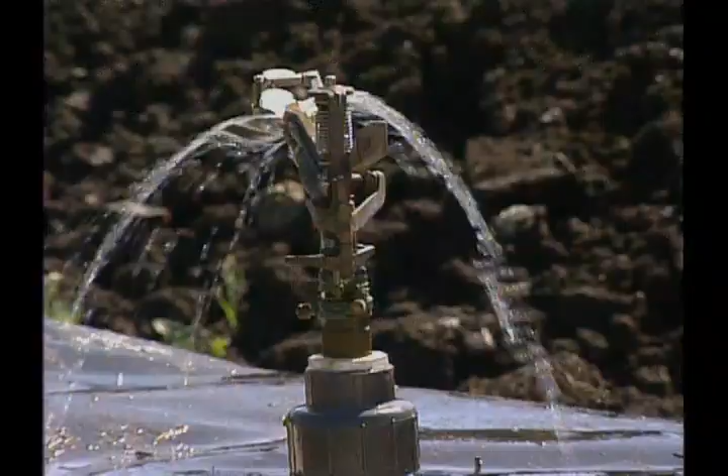Water. It's essential to our very existence, not only to meet our needs at home and on the job, but as a source of recreation and enjoyment. While many of us may think water is in plentiful supply, that is not always the case. Nowhere is that more apparent than in Southern California, where a growing population and dwindling supplies are putting the whole region on track with disaster.

For decades, this region has relied on a complex system of reservoirs and aqueducts to supply most of the water used by its businesses, industries, and people - more than 15 million today, and still growing. These supplies, imported from hundreds of miles away, put the bloom into arid Southern California, and today support an economy that ranks among the top industrialized nations of the world.

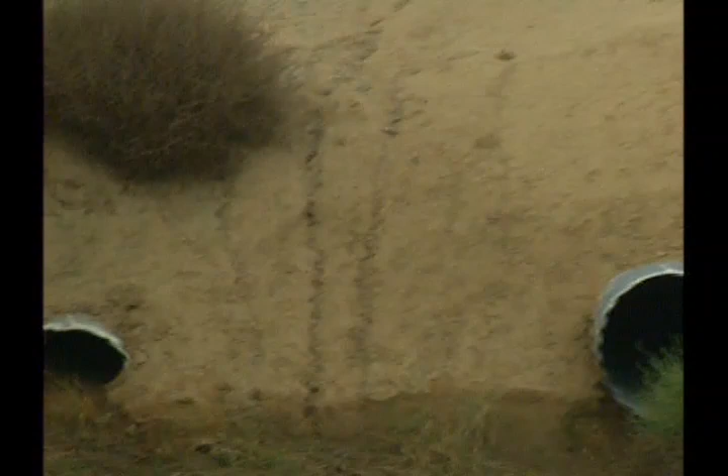A substantial portion of the area's traditional supplies have been lost through litigation, among other factors, and an enormous strain has been added by the devastating droughts of recent years. In the face of catastrophic water shortages, something had to be done to preserve this way of life for future generations, and indeed provide support for the economy on which the area relies. Billions of dollars in production and thousands of jobs were at stake. Today's environmental protection requirements for endangered species, however, make it extremely difficult to build additional water facilities and new lakes.

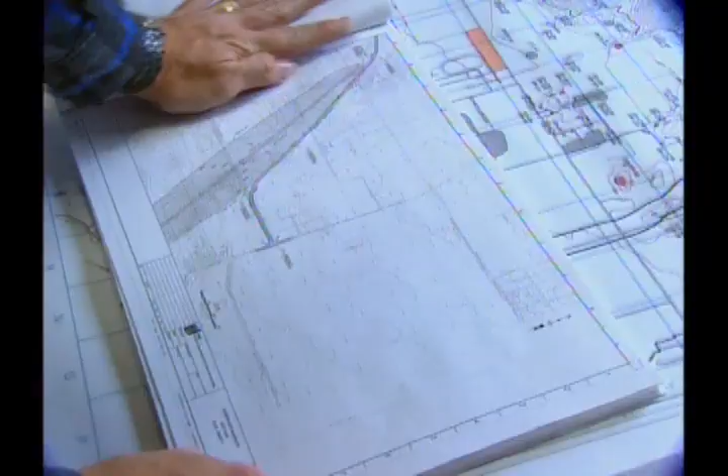But a bold and innovative partnership has developed in which environmentalists, regulatory agencies, and the Metropolitan Water District of Southern California have joined in a cooperative effort to not only help Southern California meet its needs, but at the same time protect and preserve the region's magnificent natural grasslands and woodlands, and the many species of animals that inhabit them.

Here in southwestern Riverside County, some 90 miles east of Los Angeles, nestled between these rolling hills, a huge new water storage reservoir will be constructed. When completed in 1999, dams will be in place at each end to create a reservoir in the Domenigoni Valley, 4.5 miles long, 2 miles wide, and 250 feet deep at its deepest point. It will form the largest freshwater lake in Southern California, holding more than 260 billion gallons of water.

As part of the project, Metropolitan Water District will be a major contributor toward the purchase of 3,800 acres of oak-studded hills and prairies on the Santa Rosa Plateau. In addition, the company purchased the Roy E. Shipley Reserve with its 2,500 acres of highland habitat, which will link the new reservoir's 12,000 acres with the open space at nearby Lake Skinner. A combined total of 22,000 acres will be set aside for environmental and recreational uses.

The vastness of this area will enable an entire ecosystem to be protected, rather than just individual species. Innovative programs like the Domenigoni Reservoir will help Southern California meet its water needs into the next century, while at the same time preserving valuable environmental resources, an important and irreplaceable vestige of the California of old.

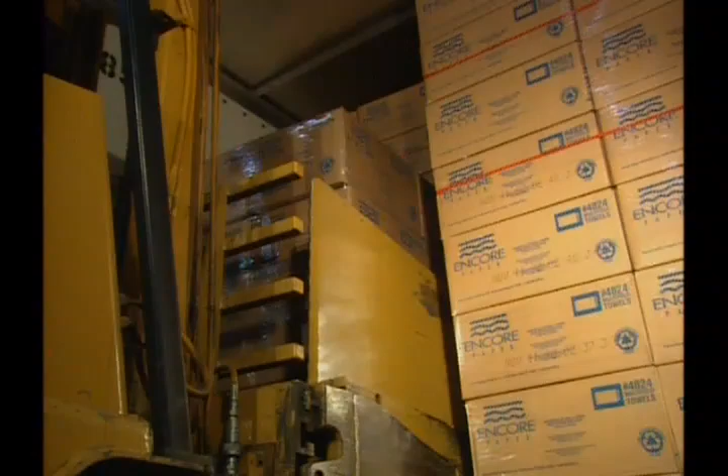Buying recycled goods is just as important as recycling them. This produces the loop that creates a demand for recycled rather than virgin-based materials for new products. Now, companies, along with consumers, are not only donating recyclable goods to help the environment, but they are also buying them.

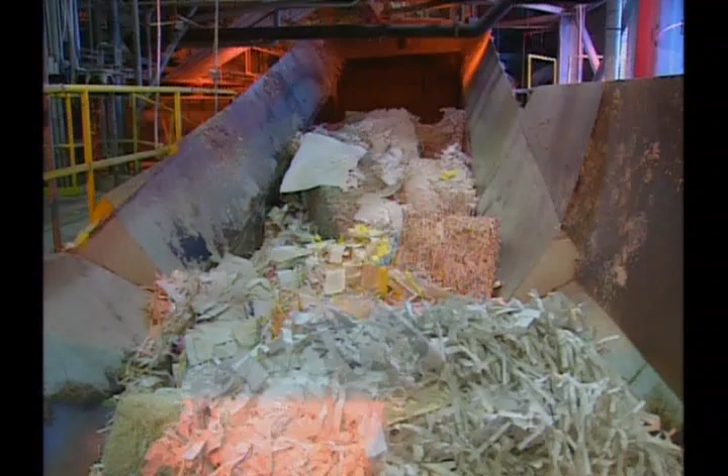Tons of discarded paper are collected from businesses throughout the Northeast each week. All of this waste paper would normally be landfilled or incinerated. But the Encore Paper Company of South Glens Falls, New York, is taking a major portion of this reclaimable resource, recycling it into paper products, and selling it back to major corporations and local businesses. This system creates its own loop and ensures a market for what was once thought of as garbage.

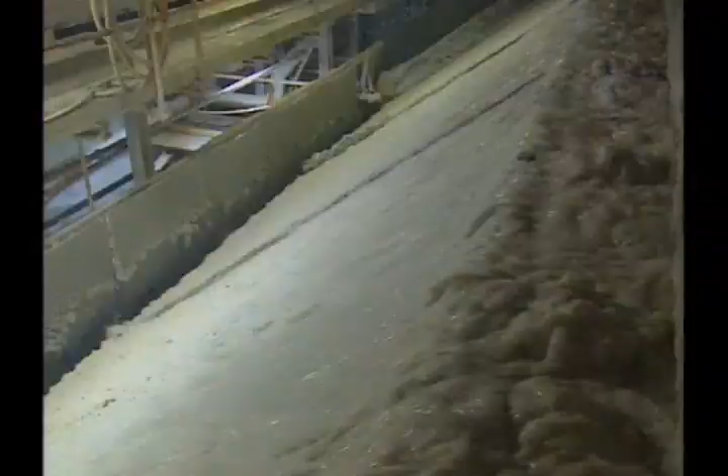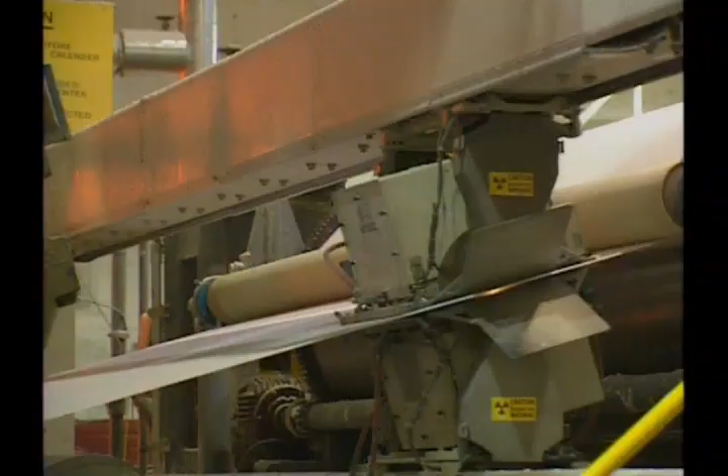The paper is brought to the plant where it undergoes its first stage, de-inking. The usable paper fiber is separated from the ink with a combination of caustic soda, hot water, and an agitator. It's then screened to get rid of any paper clips and staples. The pulp is diluted and spread over a moving screen, making thin sheets of paper, before being dried and wound onto large 2-ton rolls of paper.

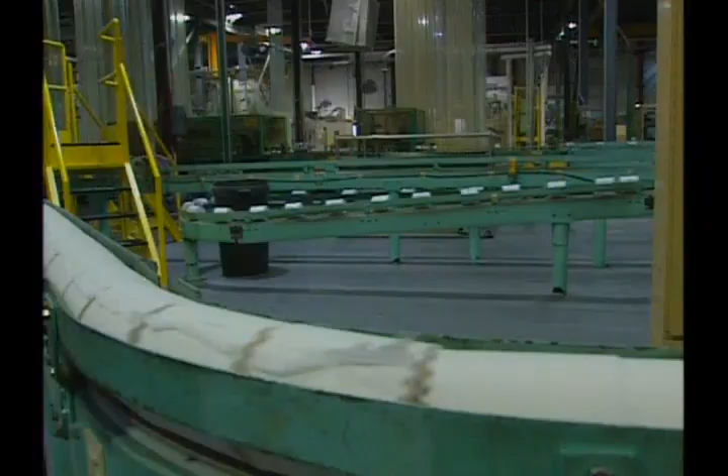These are cut, wound, or folded into smaller rolls to make all sorts of paper goods, from napkins to tissues to paper towels. Products that will be used by thousands of people every day in restaurants, department stores, and employee lounges. All of Encore's products are made from 100% recycled fiber, which saves 880,000 trees every year, a vast amount of landfill space, and keeps harmful incinerator emissions from polluting our air.

A typical faucet uses 3 to 5 gallons of water per minute. If the water is left running when you brush your teeth or shave, you're wasting a lot of water. Shut it off when you don't need it.

Next, we'll see how another environmental problem is being addressed.

What good can come from water going bad? Well, strangely enough, there can be benefits. When it was discovered that Boone Lake was being polluted by wastewater being discharged into the lake, Bristol, Tennessee, and Bristol, Virginia, the two cities which share the wastewater collection and treatment system, decided that it was time to take positive action to upgrade their facility.

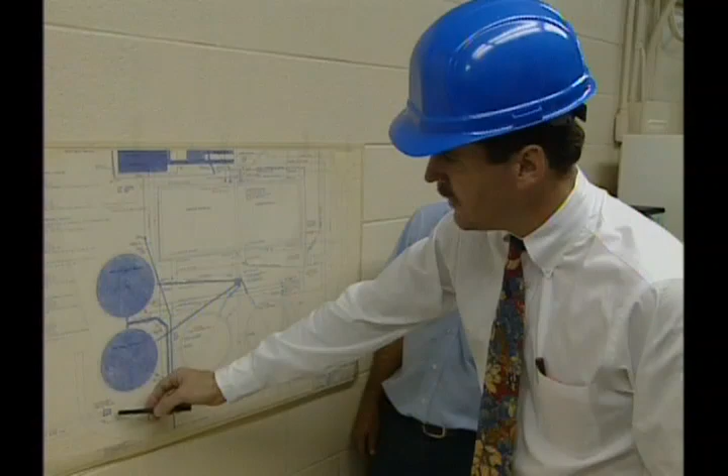With the goal of staying ahead of future demands, a $24 million program was put into effect by the Twin Cities to provide a unique solution to their biosolids or sludge disposal problems. The day-to-day operations, maintenance, and management of the system are carried out by Houston-based Professional Services Group Incorporated, which has operated the city's wastewater treatment plant since 1987.

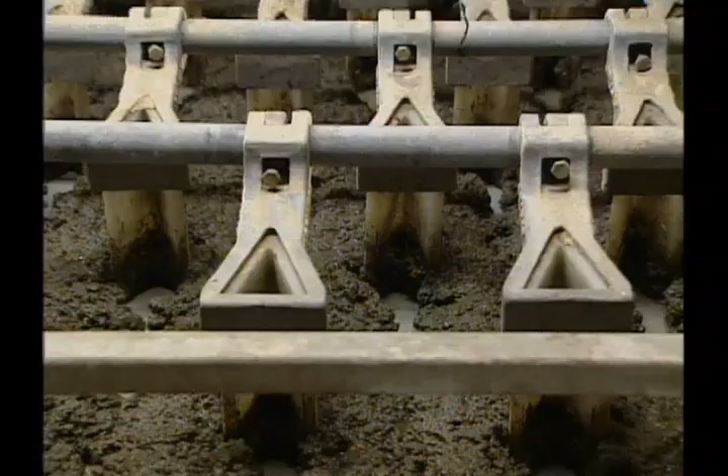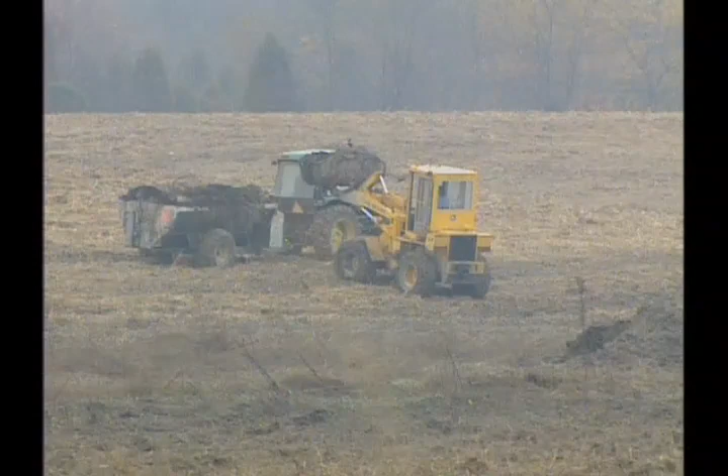One of the major problems in a typical facility is the disposal of biosolids, the substance remaining after the wastewater has been cleaned up. Because incineration proved too costly, inefficient, and unreliable, PSG began applying the processed biosolids to farmland in 1987, working closely with Bristol officials. A $7 million composting system for biosolids has replaced the land application method and is now Bristol's primary disposal method.

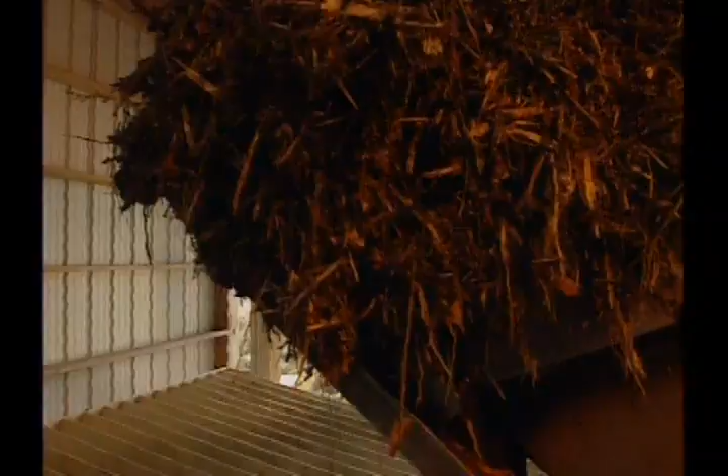Composting is accomplished in a system where a coarse sawdust is added to the biosolids. The sawdust acts as a biological carbon food source for the naturally occurring microbes, bacteria, and fungi, breaking down and decomposing the organic waste, thus creating soil improvement.

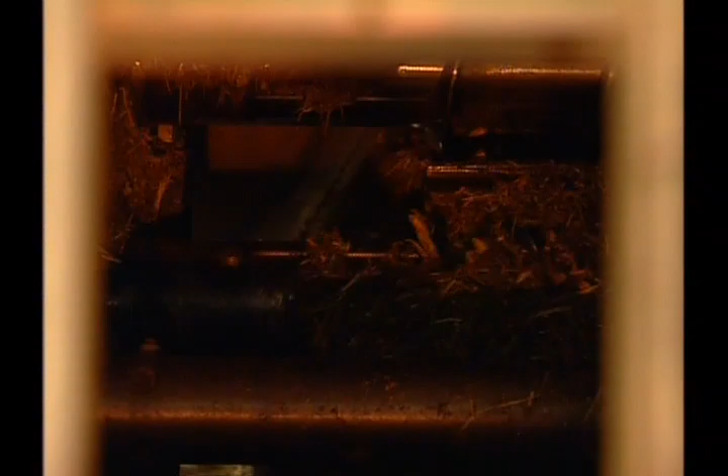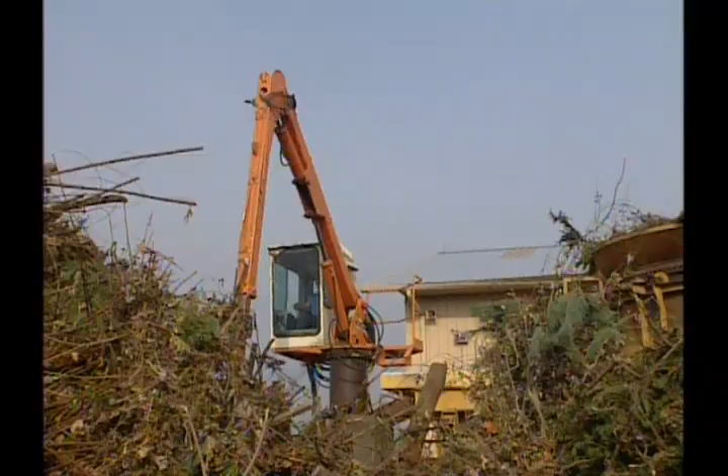The cities originally planned to purchase wood chips to grind into sawdust for use in the process, but found it was more advantageous to make it on-site from brush waste generated by both of the cities. Since this waste would have eventually wound up in the local landfill, the composting process is providing an additional environmental benefit to the community. An on-site grinder reduces the wood to chips approximately 2 inches long, which are then converted into sawdust and mixed with biosolids.

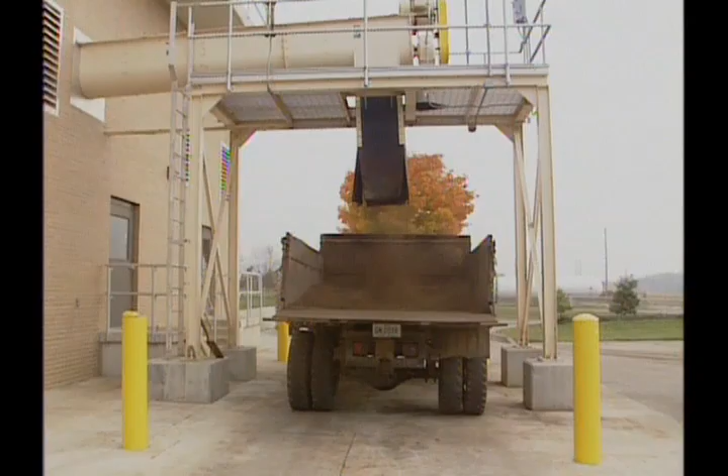The mixture remains in the system's bioreactors for 30 days, moving downwards as new materials are added at the top. Compost is removed regularly from the bottom of the cure reactor and placed in rows on a concrete pad for final curing. The result of the process is a granular, nutrient-rich soil additive that looks like peat moss.

It has been cleared by the state of Tennessee for unrestricted use. It's suitable for landscaping, nursery, and horticultural applications, and will be used at the city's public golf courses and parks. While it is currently being used for the community or given away, sales of the compost will eventually offset a portion of the compost production costs.

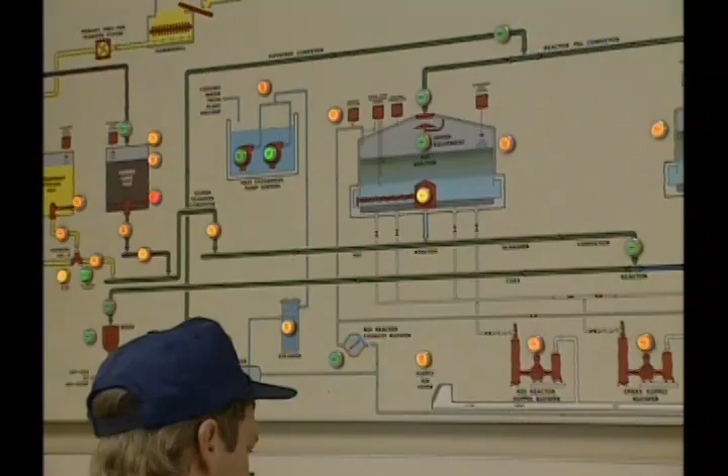Community leaders are confident that Bristol's sludge composting system will satisfy any future biosolid disposal regulations for at least 20 to 30 years, while providing some very positive benefits to the environment.

Washing a pair of jeans by itself in an automatic washer is not very environmentally sound. To get the most out of your washer and dryer, wait until you have a full load. Otherwise, you waste water, energy, and soap.

Now let's turn our attention to the solution of another environmental problem.

When we think about our environment, we must consider everything that surrounds us. We must consider the consequences of littering our streets and roads, because ultimately this is usually where it ends up, in our water systems. And what about the effects of smog and air pollution produced by industry and traffic? The effects may permanently damage the Earth's atmosphere as well as our water supplies.

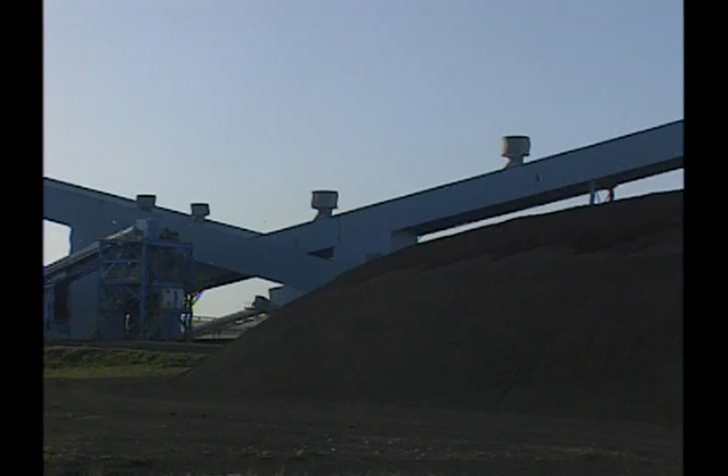A major contributor to this kind of pollution is waste of another sort, the wasting of energy. The seemingly insatiable demand for electricity has put an enormous burden on our ecosystem. Most electrical power plants are fueled by coal. Although coal is plentiful and an efficient source of energy, a major component of acid rain comes from the sulfur dioxide emissions produced by burning coal. Naturally, the more electricity we use, the more coal we burn.

But polluting power plants might soon be a thing of the past. Here in Richmond, Virginia, is an electrical power plant that's smaller than most and generates over 110,000 kilowatts of electricity, enough to satisfy the needs of 84,000 homes. But it also provides all of the steam for a neighboring chemical company's manufacturing needs.

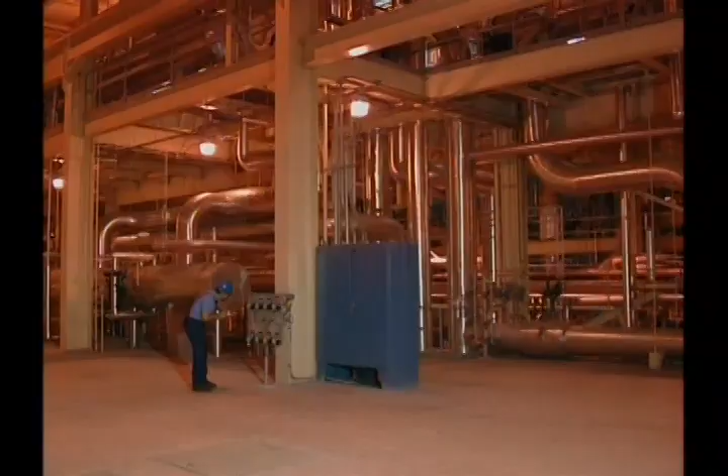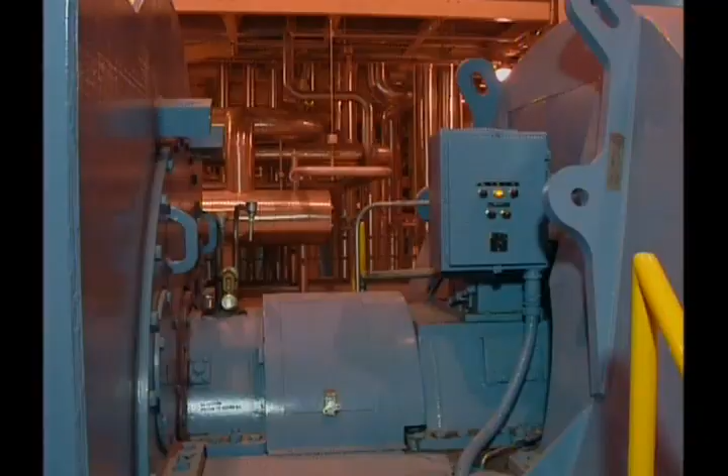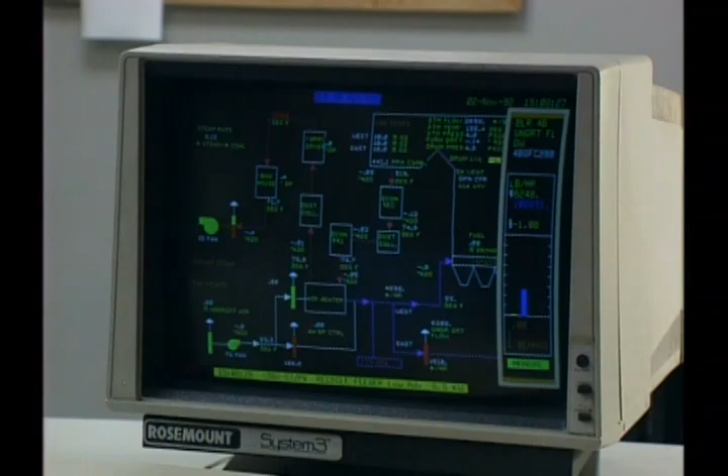It is one of 10 such utility-grade facilities developed by Cogentrix of Charlotte, North Carolina. These facilities were built at nearly two-thirds the cost of comparable facilities, making them among the most economical producers of electricity in the country. Although they're fueled by coal, these plants are also of special interest to environmentalists. They're smaller, making them less stressful to the immediate environment. They utilize innovative design, the latest environmental control technology, and cost-saving construction concepts. This is good for the economy as well as the environment, because it has greatly reduced the cost of producing electricity.

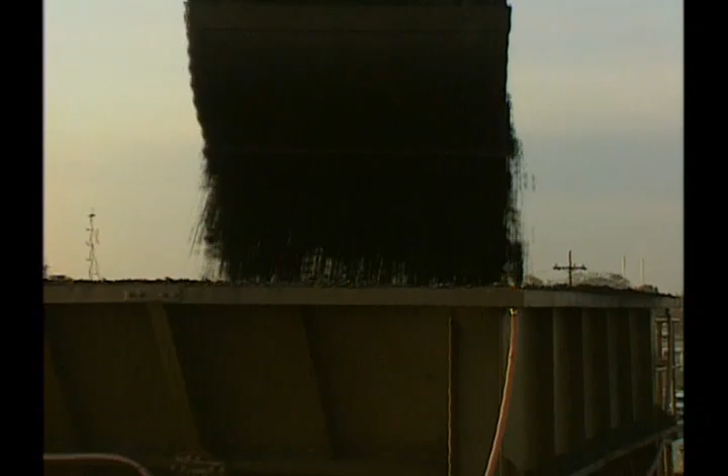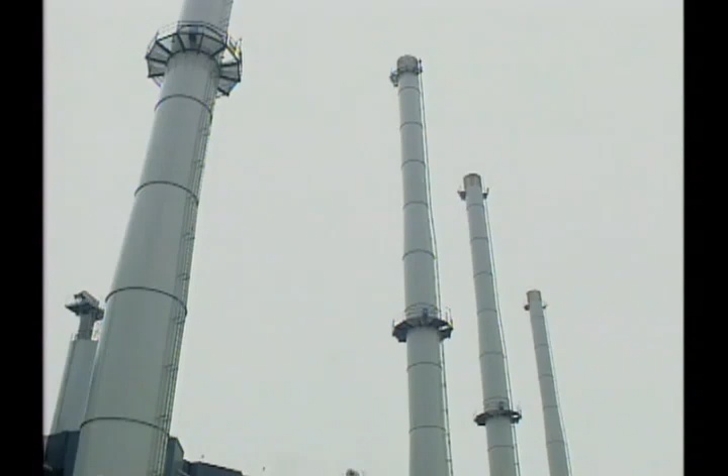This plant controls sulfur dioxide emissions to microscopic levels required by the 1990 Clean Air Act amendments for the year 2000, simply by burning low-sulfur washed coal. Some of the company's other facilities employ dry scrubbers to reduce sulfur dioxide emissions by more than 90%. Here, particulates, which are visible in smoke, are removed with a filtration system that is more than 99.8% efficient.

All of the residue from the filtration system is loaded into trucks for recycling by their subsidiary Reuse Technology. The leftover ash is used for fertilizer, potting soil, in the manufacturing of concrete block, and as structural fill. Water from brackish aquifers is treated and used in recirculating cooling towers. Environmentally safe chemicals are used to extend the use of each gallon of water in the system, minimizing demand.

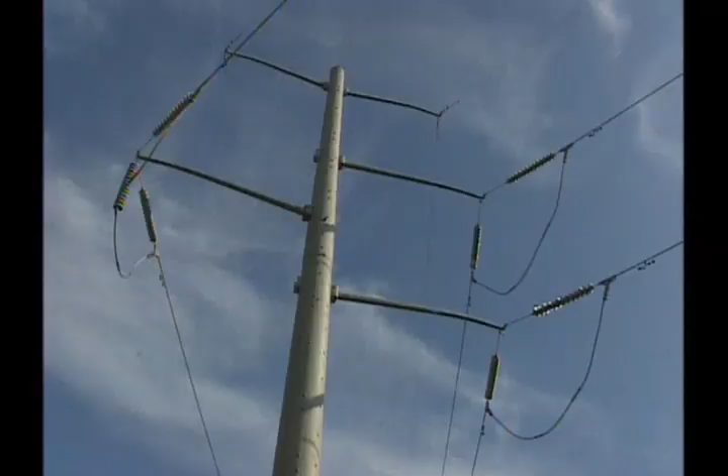Electrical power plants like the Cogeneration plant set a new standard in environmental responsibility in the energy business. Their innovative approach actually eliminates some pollutants from forming and manages those that do. And the recycling of ash residue all adds up to a successful effort in keeping the air and water clean while still providing the benefits and convenience of electrical power. Because each plant provides low-cost, clean steam to an adjoining business and electricity to the utility, they've formed partnerships with the communities they serve. Partnerships where everyone wins.

A leaky faucet that fills a coffee cup in 10 minutes can waste 3,000 gallons of water a year.

The really sad part is that a small rubber washer costing only a few cents can usually correct the problem. In this next segment, we'll see how one company is dealing with another environmental matter.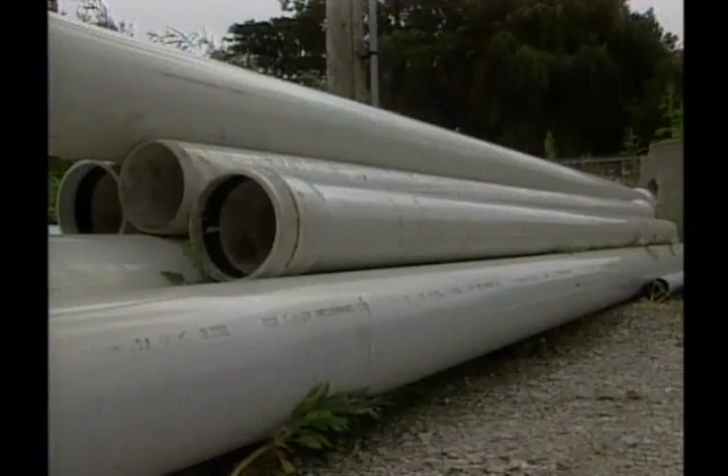If we want something to last for a long time, we take care of it. However, some things don't need to last a long time, like single-use packaging. This container, for example, is made from the same material as PVC water or drain pipe. These pipes are designed to last in the ground for upwards of 30 to 50 years. The PVC bottle may also last that long before decomposing, depending on the conditions to which it is exposed.

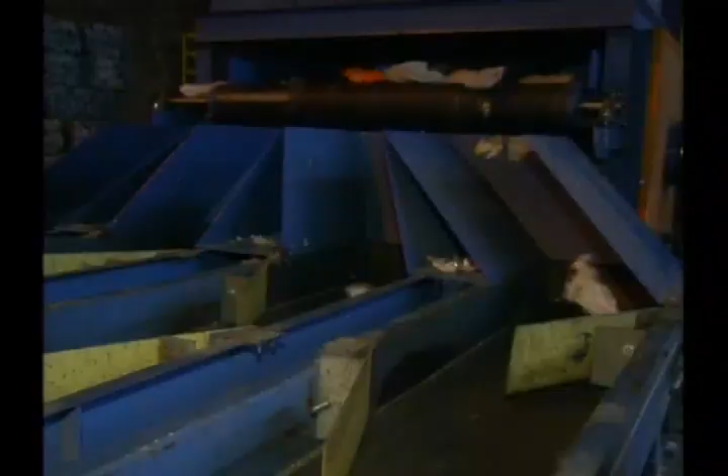If we dispose of these containers in a different way, modern technology can make good use of the discarded PVC. It no longer has to go to a landfill. Now this waste can be sent to a plant where recyclables are collected. Everything is sorted by material and sent to the proper place to be processed.

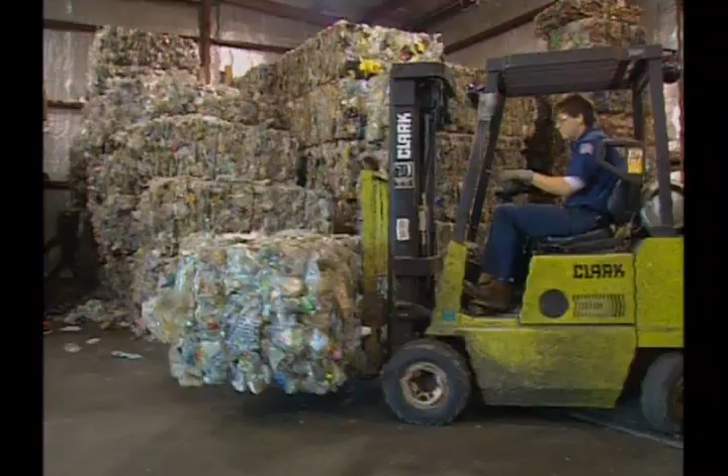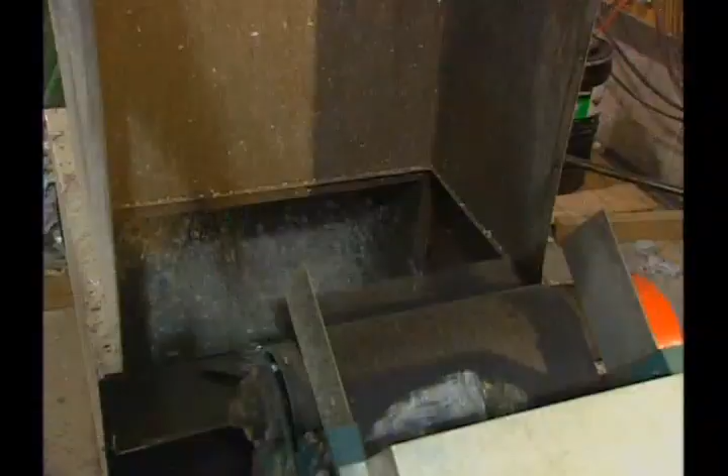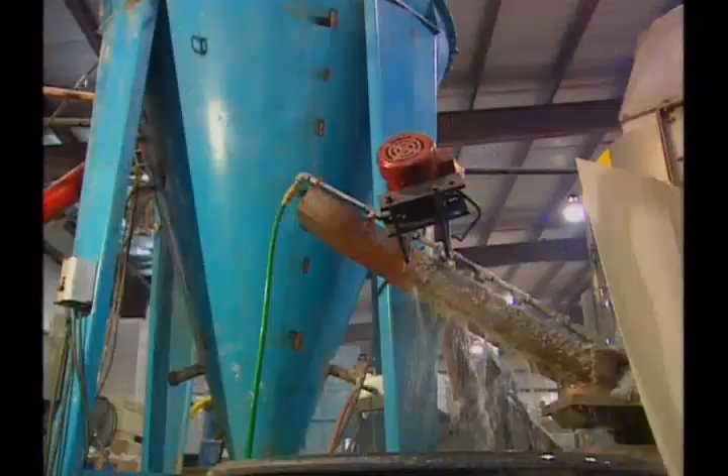Occidental Chemical Corporation of Dallas, Texas purchases discarded PVC containers from recyclers all over the country and starts them on the road to a new recycled life as EcoVinyl, the only commercially available recycled vinyl bottle compound. First, the containers are sorted and bottles are ground into flakes. The flakes are washed in soap and hot water and agitated to remove labels and residue. Then they're thoroughly rinsed, and when dried, are mixed with new PVC bottle compound at a ratio of 1:3.

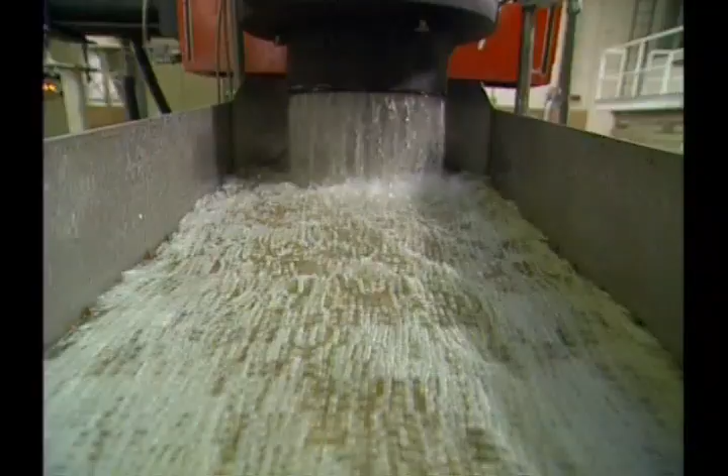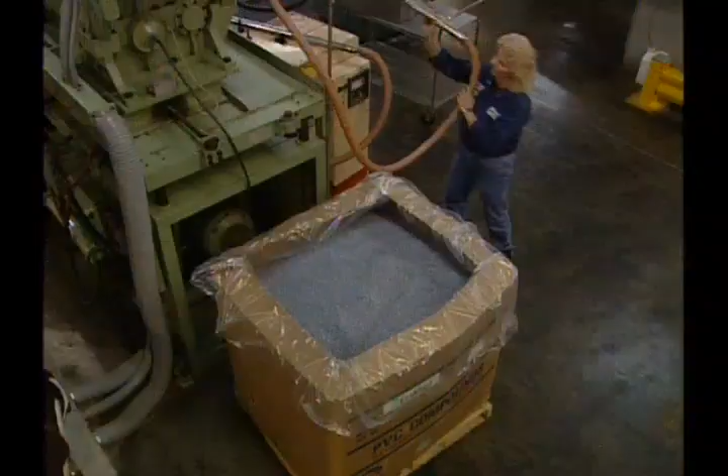They're melted and pushed through a screen for additional cleaning, then extruded and cut into pellets, not unlike being processed through a meat grinder or pasta machine. These pellets are now ready to be sold to processors like Amex Packaging Limited of Mooresville, North Carolina, who will begin the process of making the EcoVinyl material into a variety of new containers.

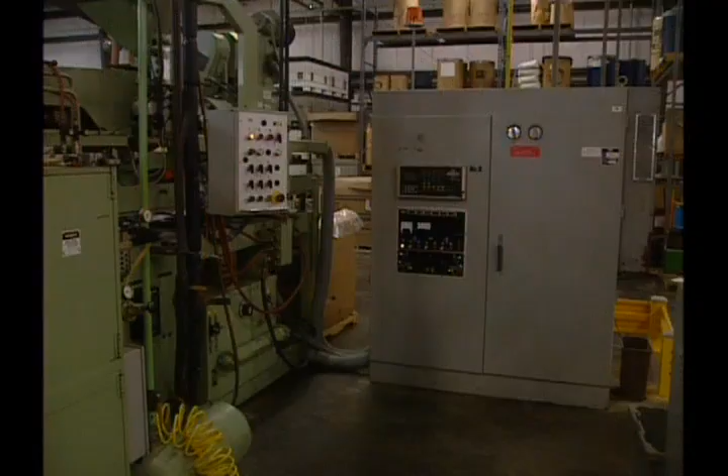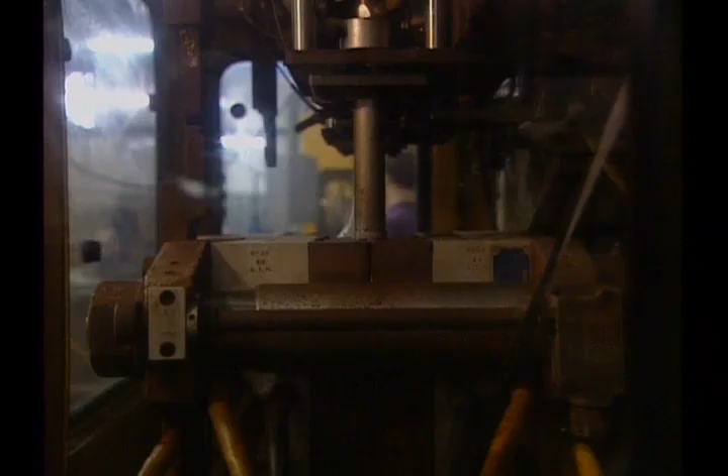When the pellets arrive, they're poured into a hopper. The hopper feeds them into the extruder section of a blow molding machine, which heats the pellets and forms them into a continuous hollow tube of plastic called a parison. A two-part bottle mold clamps together around the parison, holding it in the center and pinching the bottom. It is cut off and air is forced into the open end, blowing the parison into the shape of a bottle mold.

After the plastic cools, the mold opens and the bottle drops onto a conveyor belt. It looks like a new bottle, only this one is made with 25% recycled plastic.

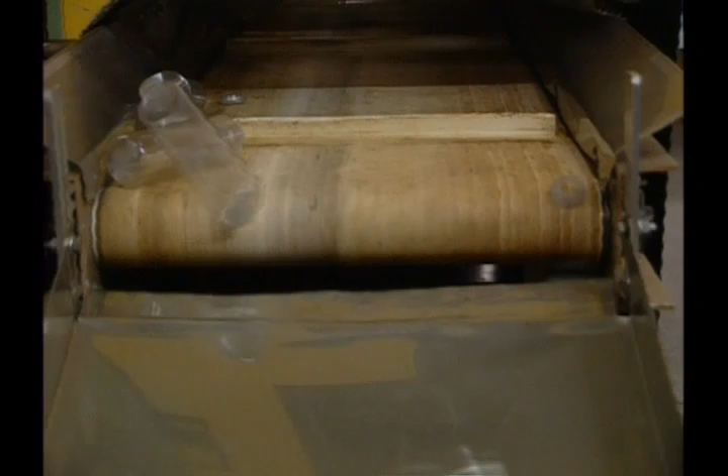A lot of people think that recycling means you take the bottles and throw them in the blue bin and set them out at the curb. But that's just the start. What recycling really means is that you buy recycled products like this EcoVinyl bottle, bring them home and use them, then throw them in the blue bin and set them out at the curb, and do it over and over again.

PVC has undoubtedly made our lives easier by giving us lightweight, shatterproof containers. But it's up to each of us to keep the recycling program alive. While not every community collects vinyl, every community can add vinyl to its recycling program. Recycling can only become a complete process when the consumer purchases products made with recycled material.

Some manufacturers still avoid using recycled bottles, thinking their appearance is inferior. You, the consumer, can change their minds. It's up to all of us to make a difference. With just a little effort, we can help technology do the job it was intended to do: protect our future by protecting Mother Earth.

Keeping the right pressure in your tires can go a long way towards helping the environment. With proper inflation, you will get better gas mileage and the tires will last longer. In our next segment, we'll see how technology is being applied to solving another environmental problem.

We never really stop to think about how it works. With the simple flick of a switch, we have light, kitchen appliances, and cool temperatures in the summertime. While consumers expect their electricity to be accessible at any time, power companies are always searching for ways to be more energy efficient. One alternative source of energy is hydroelectric power, the production of electricity through water power.

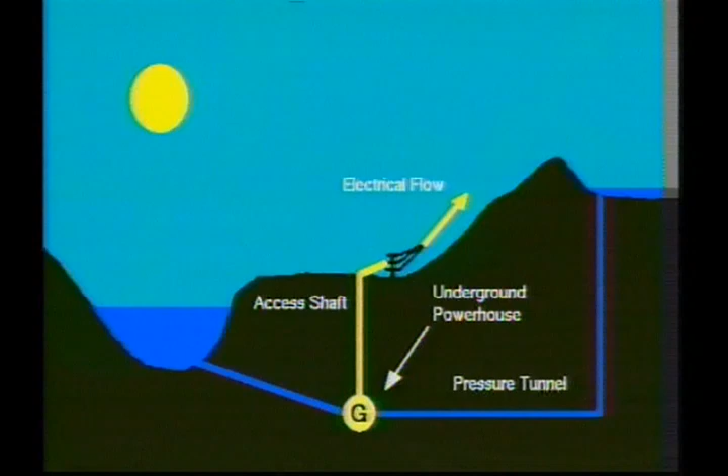During peak consumption periods during the day, a pump storage facility releases water from an upper reservoir to drive its turbines and produce electricity. This electricity is then sold to utilities, which add this power into their existing distribution network. The water is then collected in a lower reservoir, and during nighttime off-peak hours, by reversing the turbines and utilizing unwanted available power, it is pumped back to its original source for reuse.

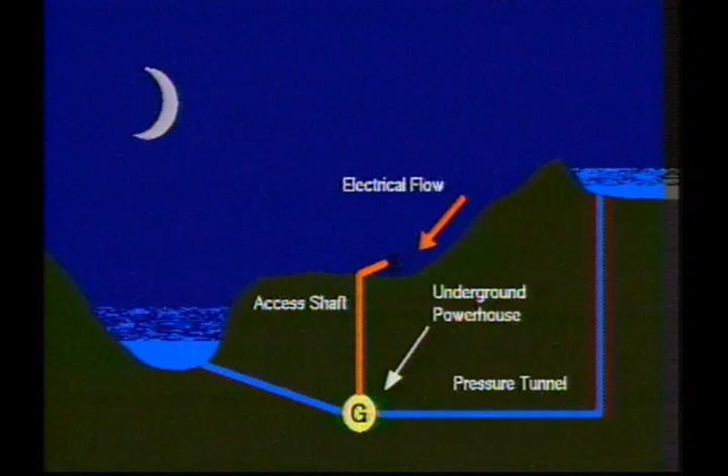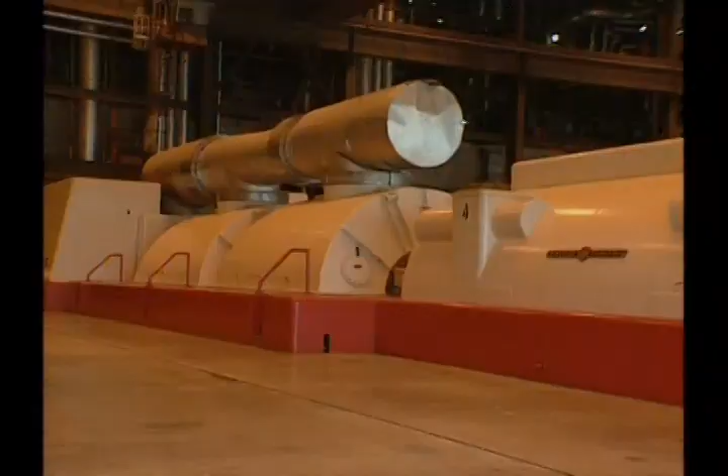This provides two benefits. It saves utilities from having to activate additional coal, oil, and gas-powered generators to handle demand for extra energy during peak hours, in addition to providing them with the ability to run their thermal units more efficiently, thus eliminating the need to reduce the efficiency of existing units at night, which would create additional pollutants.

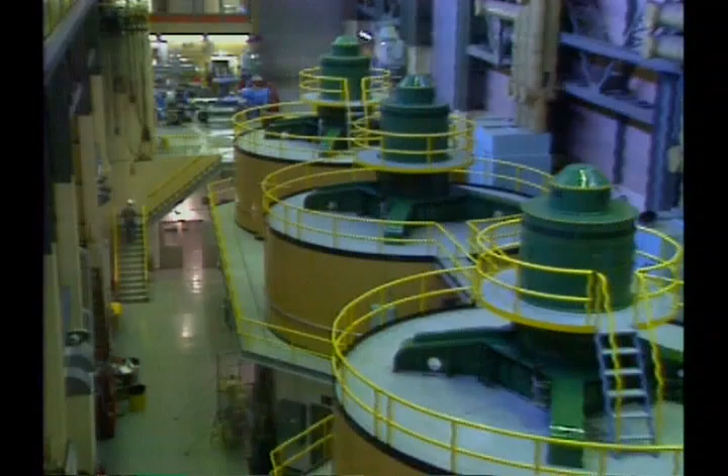Kvaerner Hydropower Incorporated, located in Stamford, Connecticut, is a member of Kvaerner's International Group of Hydropower Companies. This organization not only builds but operates a variety of hydropower facilities worldwide, and was instrumental in the development of high-head pumped storage power generation.

In response to growing demands for energy and global efforts to conserve our resources, the company has designed a state-of-the-art 2,000-megawatt hydro plant to be built underground in Rockaway Township, New Jersey, just 30 minutes from New York City. At an estimated cost of $1.8 billion, the system will produce electricity in the midst of one of the largest power markets in the United States.

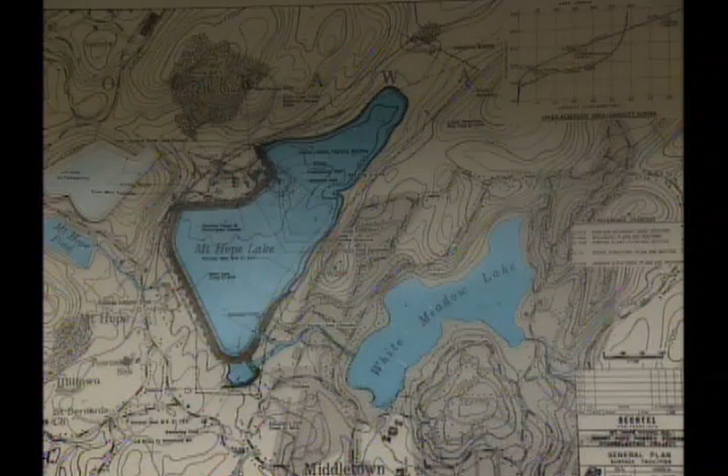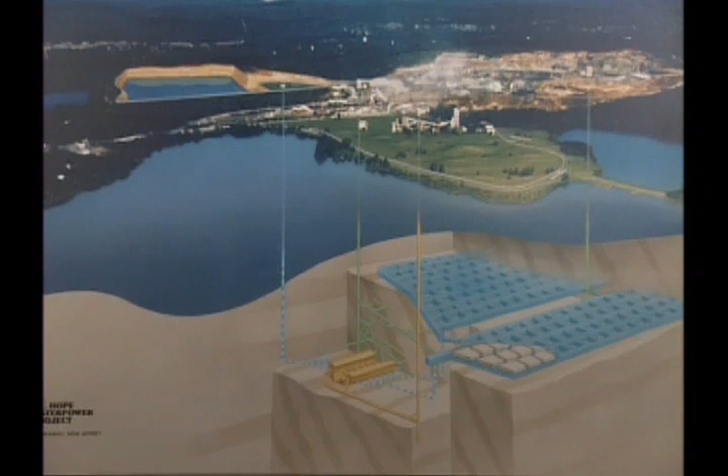When the Mount Hope Water Power Project becomes operational sometime in 1999, it will be the only pumped storage hydroelectric power station utilizing an underground artificial reservoir, with water from a surface reservoir supplying the turbines, and the spent water being held in the underground reservoir excavated some 2,500 feet beneath the surface.

For decades, pumped storage has provided for clean and efficient energy storage. Modern pumped storage technology additionally gives utilities the ultimate tool to optimize the use of their existing facilities, thereby reducing pollution levels.

In fact, not only will their power needs be met, but additional benefits to the local township will be found in the creation of an environmental center, restoration of surrounding historical structures, and the development of recreational areas. Solutions like these provide us our modern conveniences when we need them, where we need them, without sacrificing the future of our children or our planet.

If you're among the more fortunate people who have a heated swimming pool in your backyard, you can reduce your energy costs by using a pool cover. These inexpensive covers will prevent heat from escaping during the night, meaning you use less energy to maintain a comfortable water temperature.